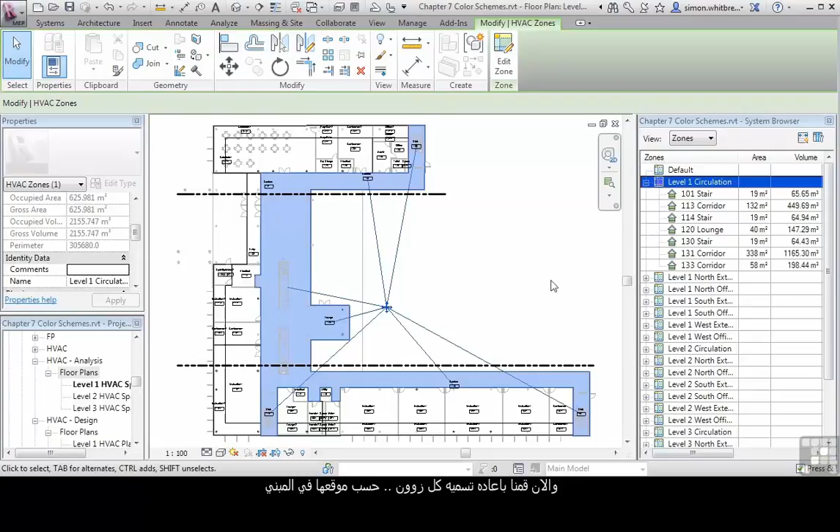The story so far: we've created spaces, we've created zones, and we've now named all the zones according to the particular area of the building that we're interested in. What I want to do now is create a colour scheme that will show me, for example, the different spaces shown as colours. I'm going to clear my interface just a little bit.

Let's get rid of the system browser. We don't need to use it in this exercise. And I'll drag my properties palette to the right hand side of the screen. At this point, I'm going to start duplicating some of the views I have. Here I have level 1 HVAC spaces. I'm going to create or duplicate this view,

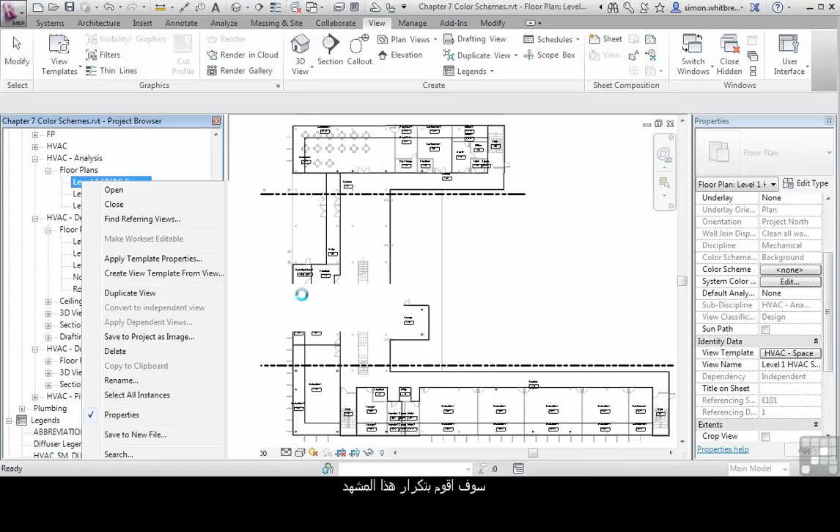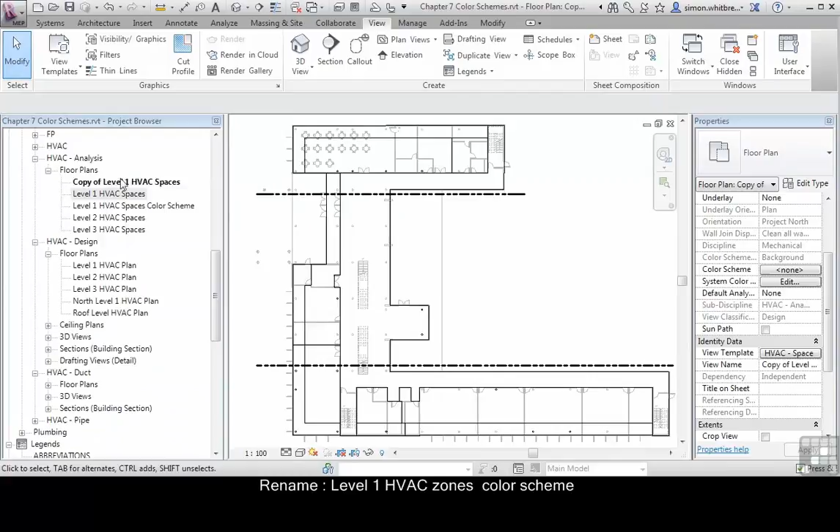and with it copied, I'm immediately going to rename it, and we'll call this one level 1 HVAC spaces colour scheme. I'm going to do that again, rename it, and we'll call this one zones colour scheme.

So let's start with the spaces. What I want to do here is place a colour scheme. From the Analyze tab, click on Colour Fill Legend and place it in the drawing area. This gives me a warning message. A colour scheme has not been assigned to the view. The legend will appear blank. To apply a colour scheme to the view, choose a space type and scheme and press OK.

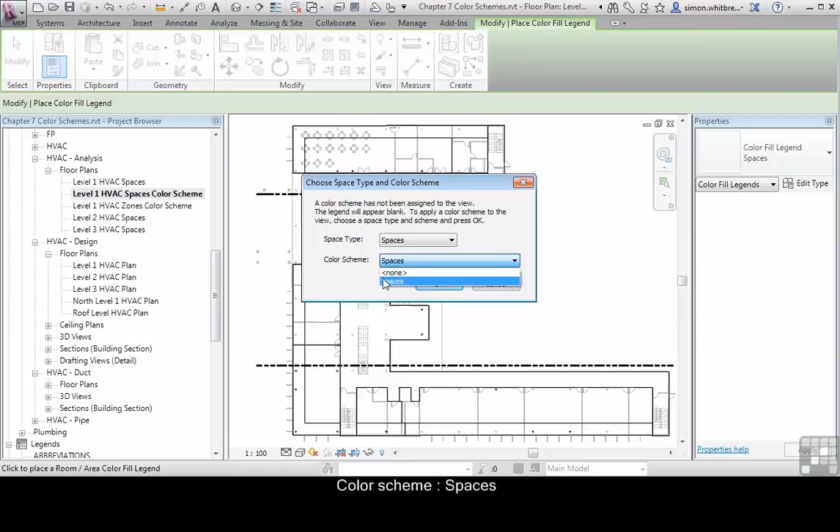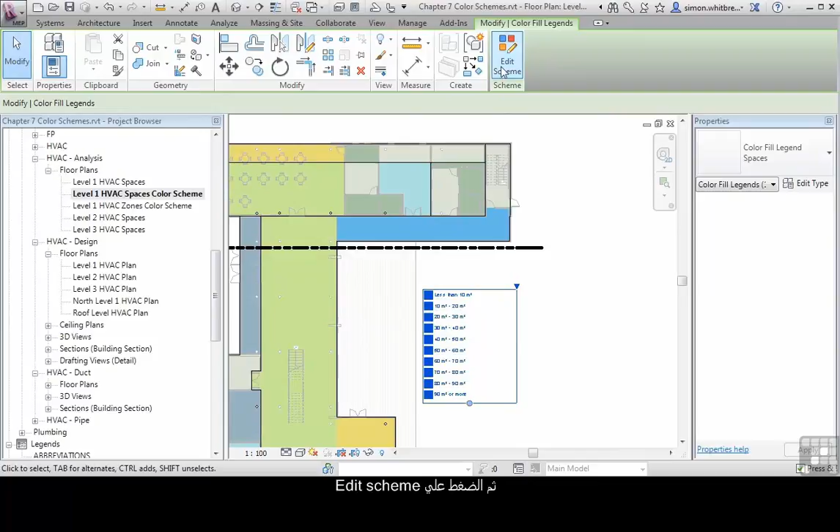So I'm going to choose spaces, and the colour scheme I'm going to choose is spaces. Click on OK. This has now created a colour fill legend that shows me spaces arranged in a range of sizes. We can edit this colour scheme by selecting the colour scheme itself, click on Edit Scheme, and change things like whether these are visible or the actual colours that display on the screen. Click on Apply and OK.

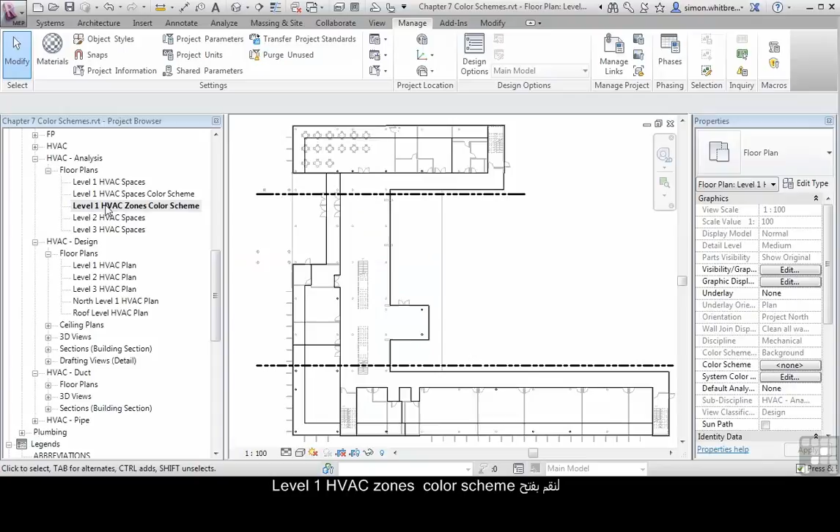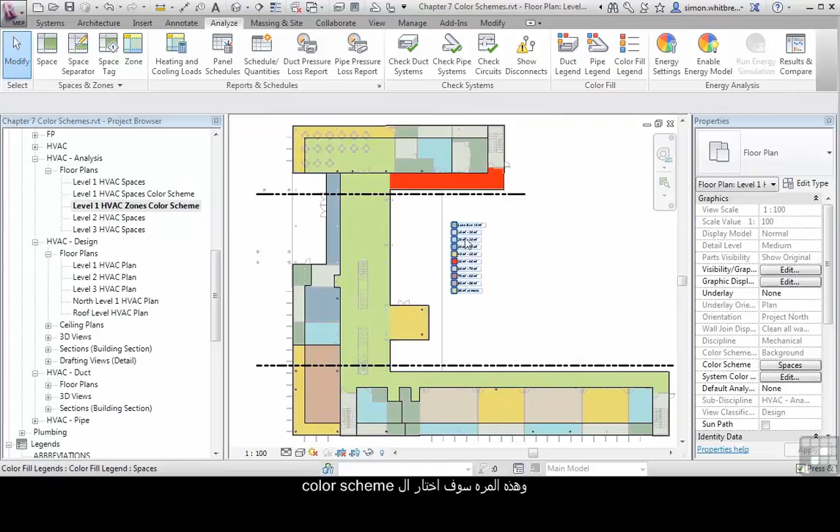I now want to apply a colour scheme to the zones. So let's open the Level 1 HVAC Zones Colour Scheme view. Just as before, I'm going to go to the Analyze tab, click on Colour Fill Legend, and I'll place that legend. This time I'll get the same message as before. I'm going to click on OK, and this time I'm going to select the colour scheme and edit its type.

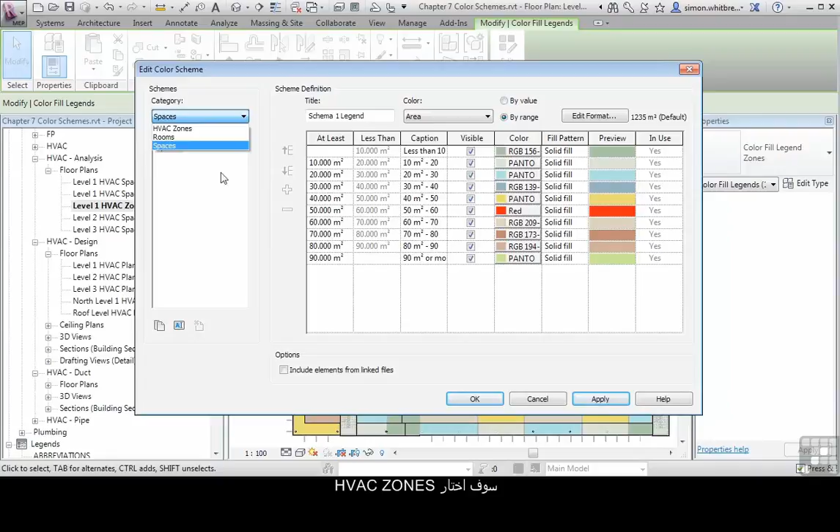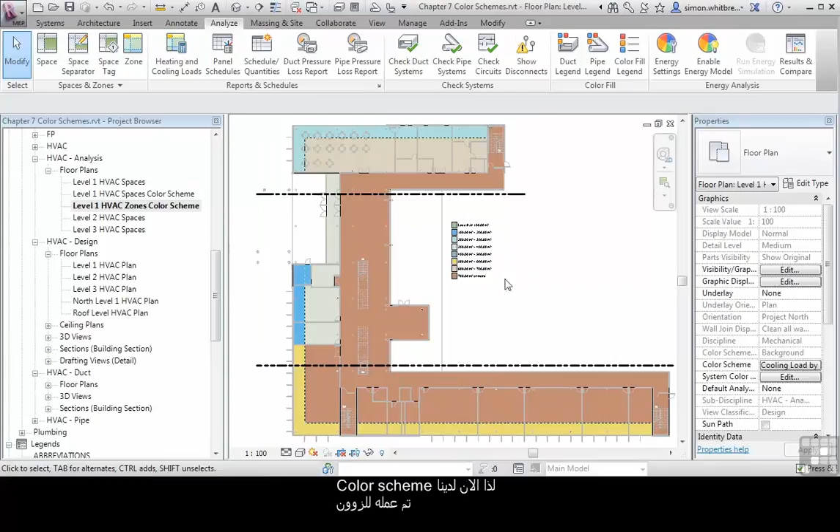I'm going to duplicate this scheme. We'll call this one Zones. Click on OK and OK, and then edit the scheme. This time, rather than spaces, I'm going to go for HVAC zones. Let's go for cooling load by zone, and we can add values in here or change what we actually want to see. Click on OK, and this changes our view. So we now have a colour scheme for the zones and also a colour scheme for our spaces.